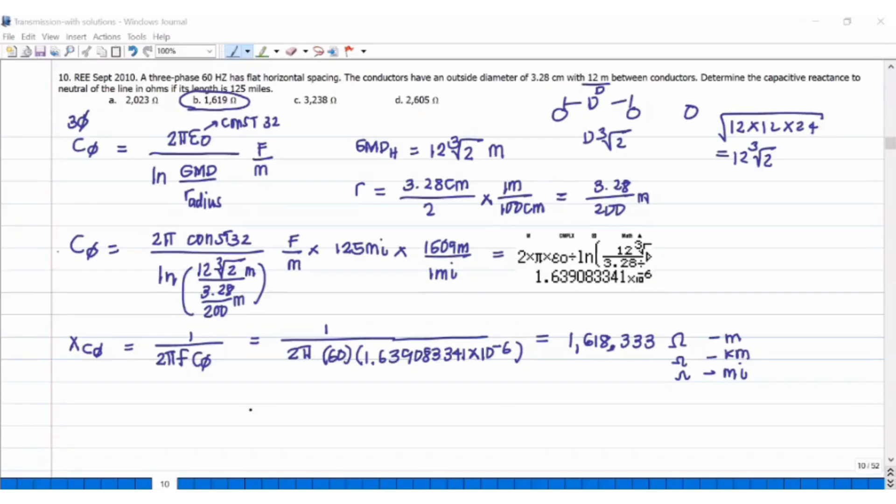Number 11. The conductors have an outside diameter of 3.28. Determine the capacitive reactance to neutral.

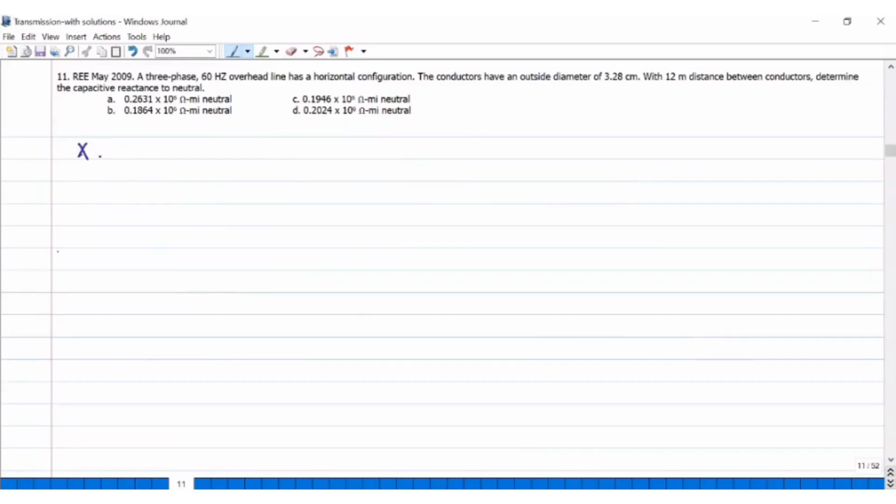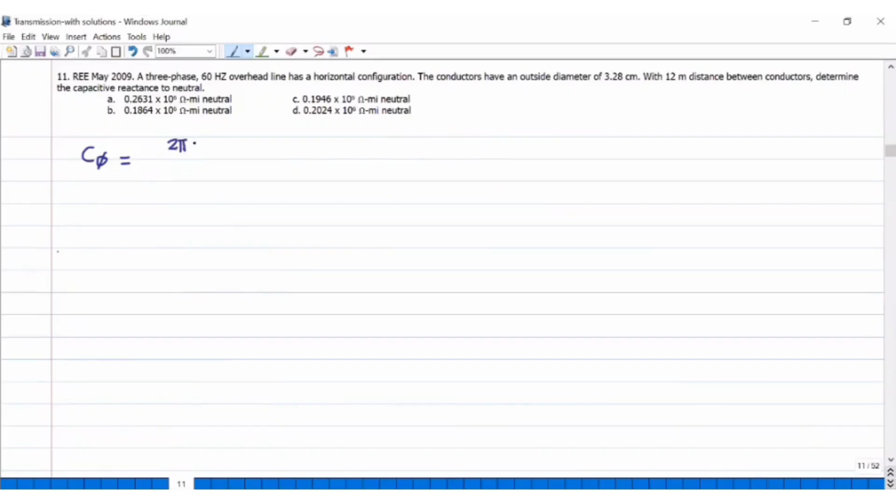So the value we computed earlier, XC per phase, is parehas ito dun sa number 10. So C per phase is 2 pi EO divided by ln of GMD divided by the radius. This is in farad per meter.

The unit of capacitive reactance is in ohm mile, so let's convert the distance to miles. 1,609 meters in 1 mile. But wala yung 125 miles. That will be 2 pi times constant 32.

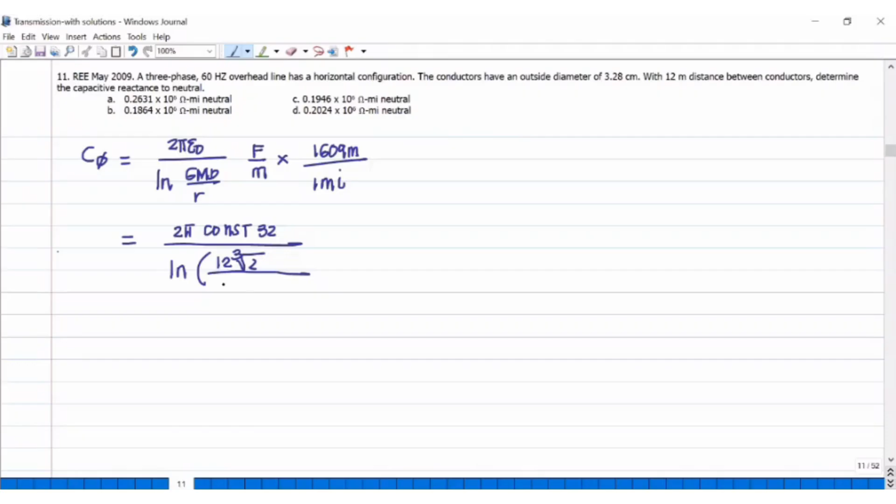Divided by ln of GMD, so 12 times cube root of 2 all over, earlier, 3.28 over 200 meters, times 1,609. Okay, so that will be in farad per mile.

Compute. Wala yung 125. Times 125. Ay, wala nga yung 125. 1609. 1.3113.

Then the value of XC per phase, 1 over 2 pi 120 pi times 1.311266673 times 10 to the negative 8. This will be in ohm mile.

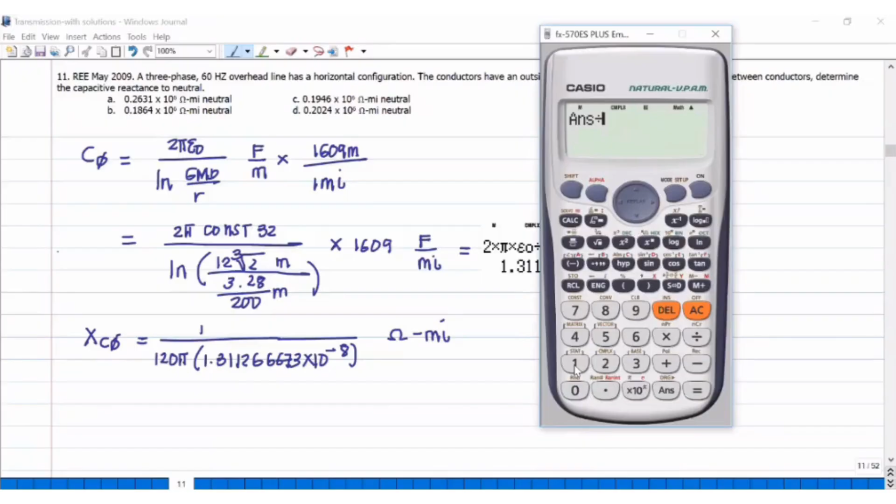So the mile unit here will increase. So this will be times 120 times pi. Then inverse, then divided by 1 exponent, giving 0.20229 times 10 to the 6 ohm mile.

Neutral. So nearest siya sa letter D.

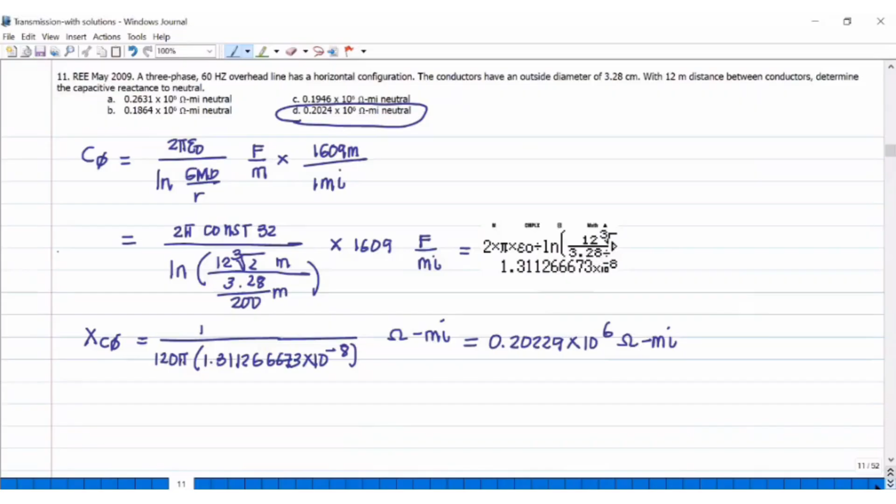Number 12. Calculate the capacitive reactance in kilo-ohm kilometer of a bundle 60 Hz 3-phase line having 3 conductors per bundle with 45 centimeters between conductors of the bundle. The outside diameter is 0.175 inch.

And the spacing between the bundle centers is 10, 10, and 20. This is how the conductors look.

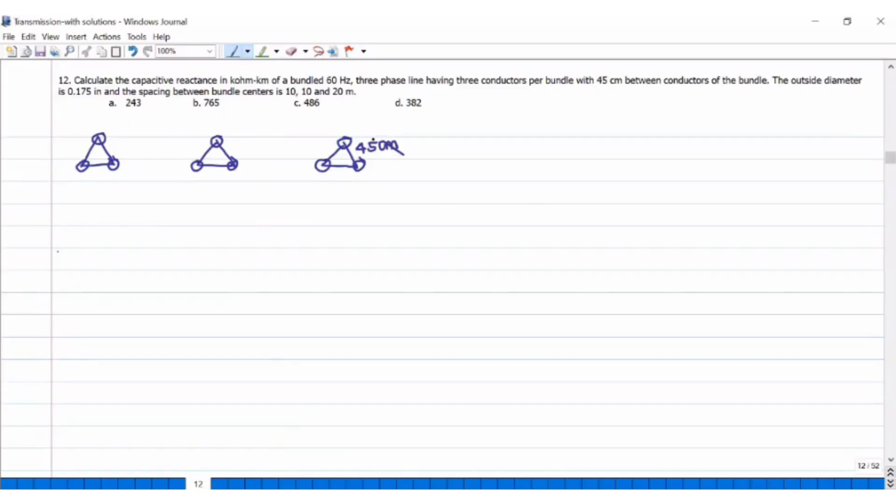So per bundle there is 45 centimeters. Then between centers, the adjacent spacing is 10 meters. Then on the other side also 10 meters. So it's still horizontal. So the equivalent GMD...

For horizontal configuration, the one adjacent side times cube root of 2 meters. Then the value of the equivalent radius for bundling. Okay, so this is for 3 conductors.

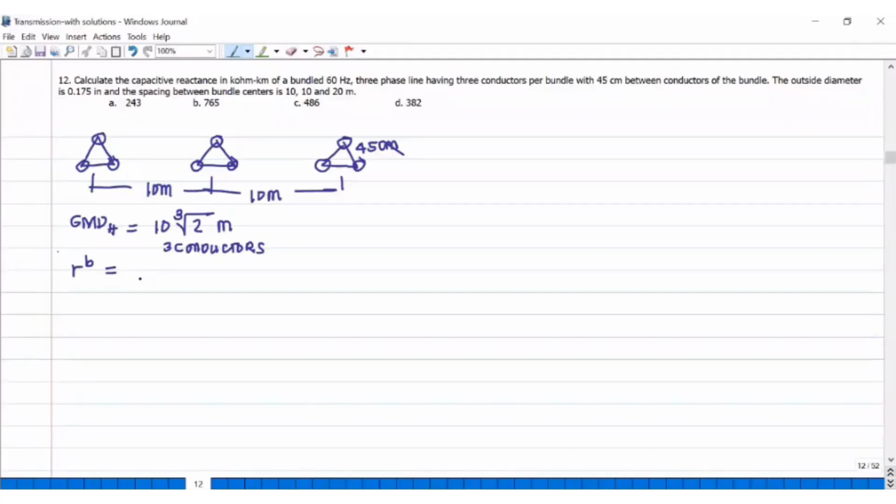Kindly refer to your handout. That will be cube root of the radius of each times the distance of bundling squared. This is the distance of bundling, between conductors. So that will be cube root of the given diameter.

0.175 inch. We divide by 2 to get the radius. Times, convert it to meters. 1 meter equals 39.36 inches.

Multiplied by the distance of bundling, 45 centimeters in meters, 0.45 meters, divided by 100, so that's 0.45, times 0.45 meters, then the quantity squared. Cancel the inches, so the remaining unit is cube root of meter cubed, so that will be in meters.

It's a small value, smaller compared to the GMD. Cube root of 0.175, divide that by 2, divided by 39.36 times 0.45 squared, giving 0.07.

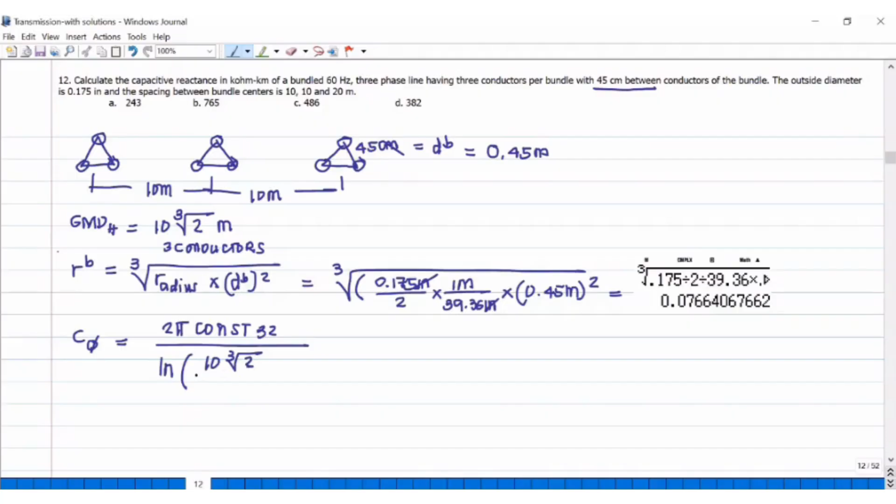So that will be 2 pi times constant 32 all over ln of GMD, that is 10, times cube root of 2, over in meters, also in meters, divided by 0.07664 meters. This is in farad per meter.

So let's convert it per kilometer, times 1,000 meters in 1 kilometer, is equivalent to an inverse, times 10 times cube root of 2.

Then you take the ln, that's in the denominator, times 2 times pi times shift constant 32 times 1,000. The unit of this is in farad per kilometer.

So what is XC per phase? 1 over 2 pi F times C per phase. So from farad per kilometer, the result will be in ohm kilometer times 120 times pi.

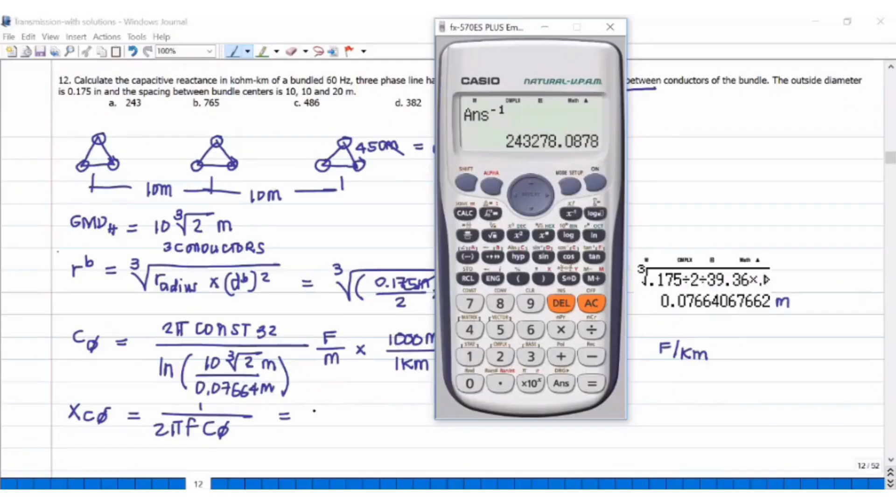So 2 pi F equals, then inverse, 243,278.0878. This is in ohm kilometer.

Multiplied by 1 kilo-ohm, equivalent to 1,000 ohms. That will be 243.278 kilo-ohm kilometer. So letter A.

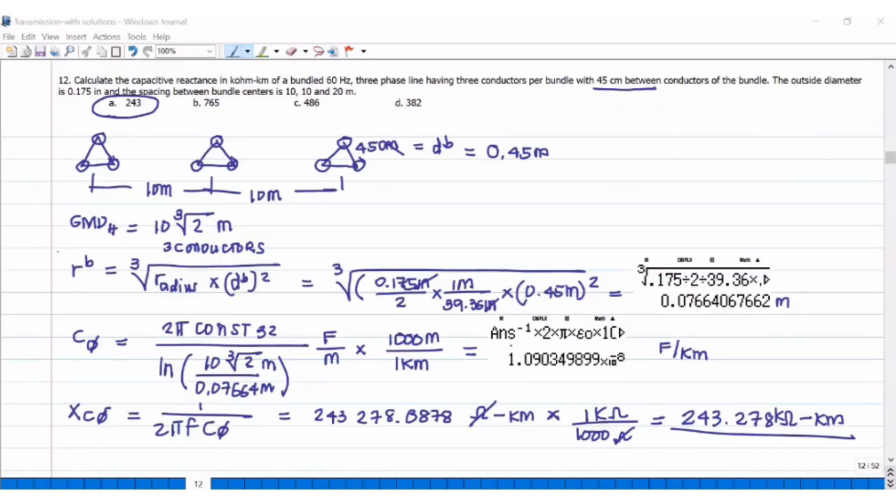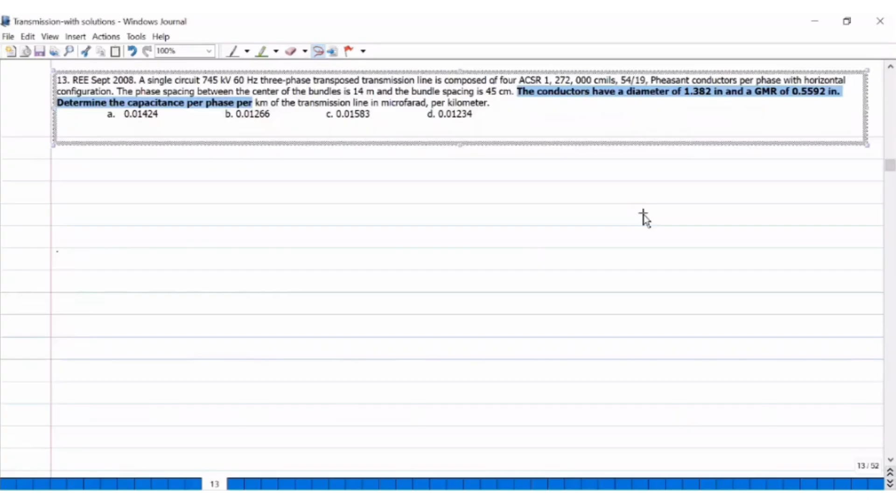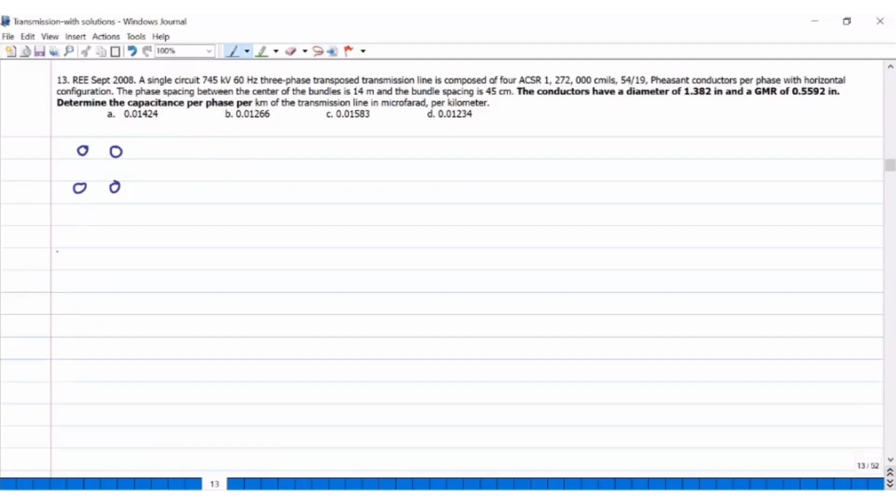So per kilometer, now there are 4 per phase. 1, 2, 3, 4, that's for phase A. Phase B, 1, 2, 3, 4. Phase C, 1, 2, then 3, then 4. There are 4 of them.

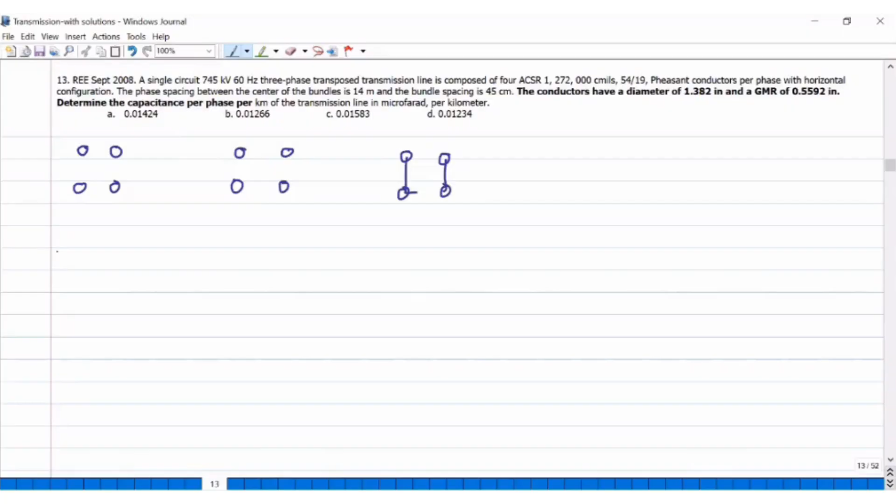So this is the distance of bundling. Okay, so for the radius of bundling for 4 conductors, RB is equivalent to...

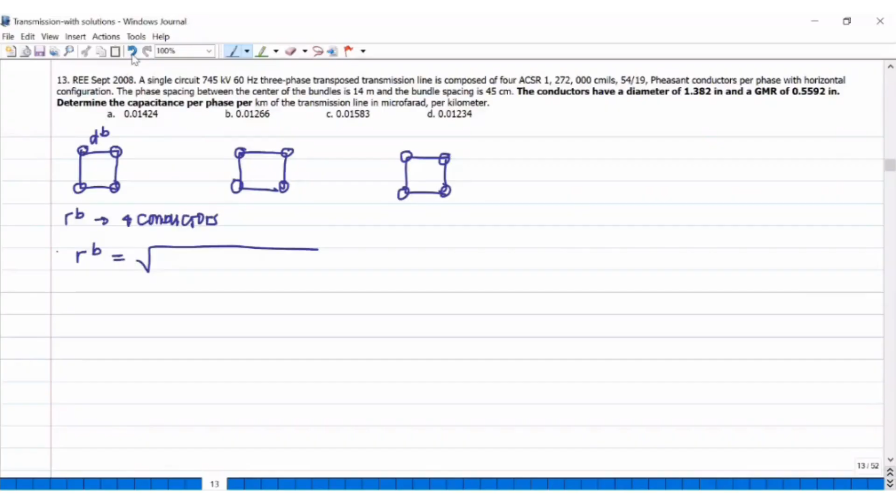The value 1.09 times the 4th root of the radius of each multiplied by the distance of bundling raised to 3.

The 1.09 is the 16th root of something, square root of 2. That's the value. It's d square root of 2. So it's like this: 16th root of square root of 2 raised to, 1, 2, 3, 4 raised to 4.

There it is, 1.09 is the constant there. If you're wondering where the 1.09 comes from, here it is: 16th root of square root of 2 raised to 4, because of the diagonal.

So 1.09 times the 4th root of the radius of each. So here we go: 1.382 divided by 2 times 1 meter.

There are 39.36 inches. Then the distance of bundling, okay, 45 centimeters again, that's 0.45 meters.

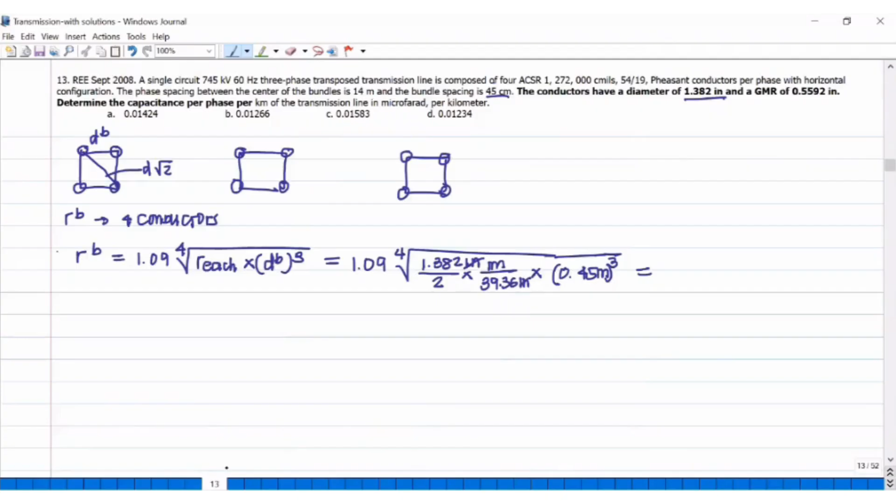1.09 times 4th root of 1.382 divided by 2 divided by 39.36 times 0.45 raised to 3.

Yan yung equivalent radius of bundling for each phase. Again, that is horizontal configuration. So ang GMD, ulitin natin yung ginagawa natin dati. Yung isang distance, 14 times cube root of 2 in meters. So ito, naka-meter din. So dapat yung radius of bundling saka GMD parehas ang unit.

Kaya yung capacitance per phase, tapos per kilometer, capacitance. So that will be 2 pi times constant 32 divided by ln of GMD 14 times cube root of 2 all over the radius of bundling, yung equivalent na nasolve natin, 0.2179925355, both in meters. This is in farad per meter times 1 times 10 to the 9.

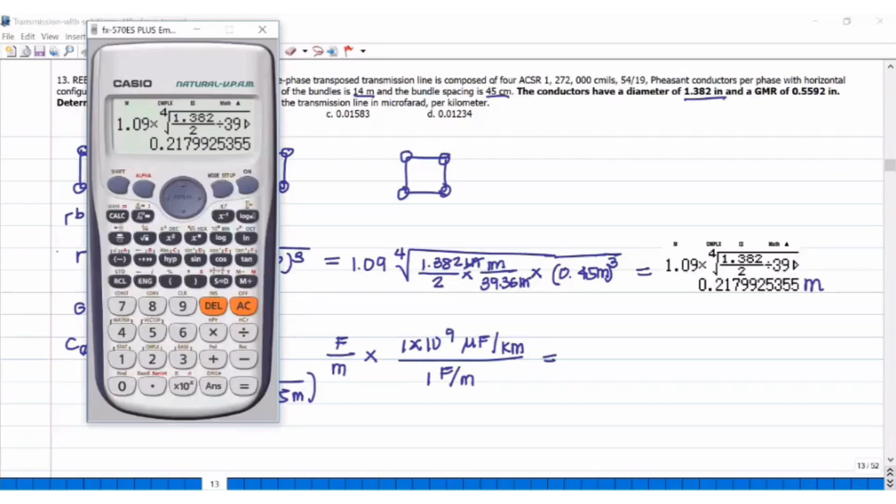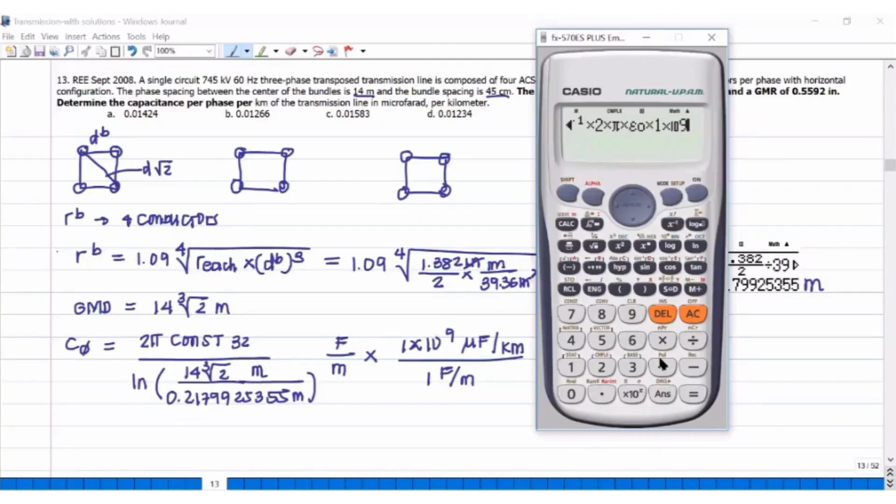Microfarad per kilometer. Yan yung conversion in 1 farad per meter. So nasa baba yan, inverse times GMD 14 cube root of 2, inverse ln, then inverse times 2 times pi times constant 32 times 1 exponent 9 to 0.01266, which is A, B, C, D.

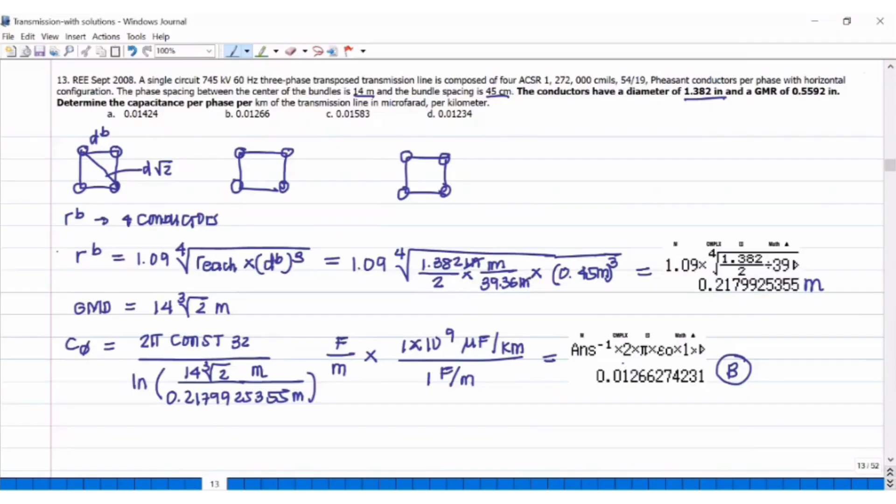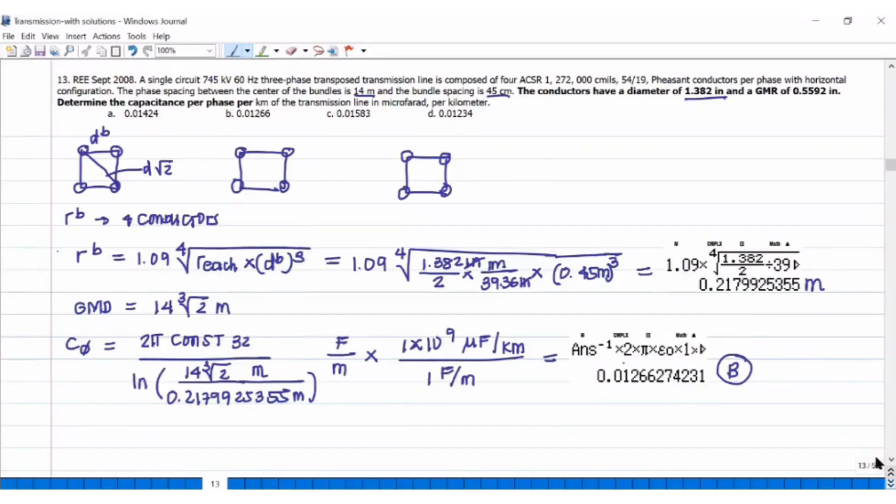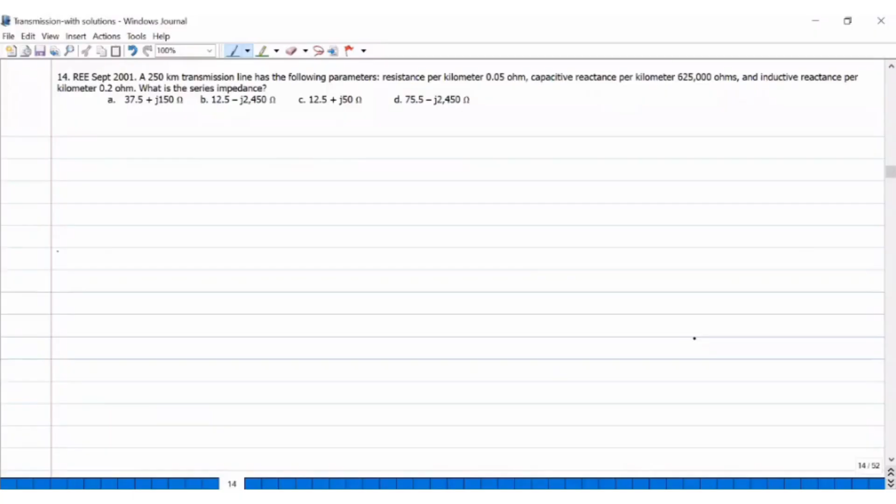Okay, next. Layo-layo pa. 14. A 250 kilometer transmission line has the following parameters: the resistance per kilometer, capacitive reactance per kilometer, 625,000 ohms, and inductive reactance per kilometer. What is the series impedance? So that is R plus JXL.

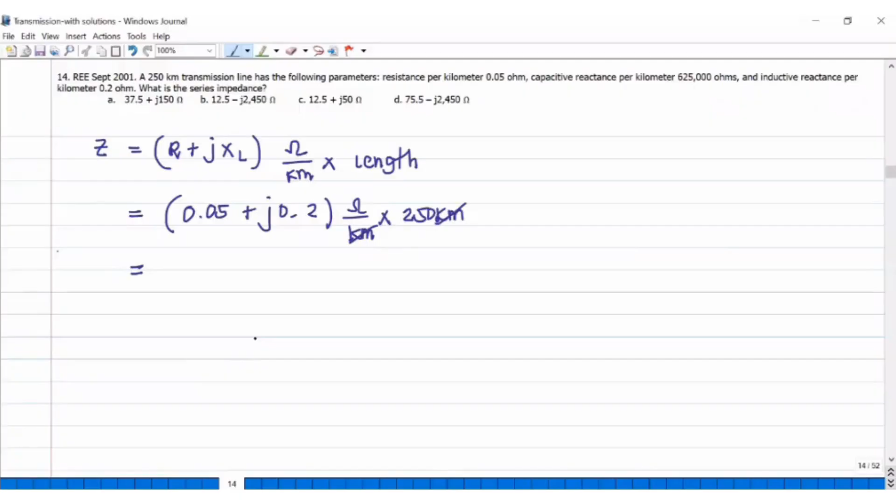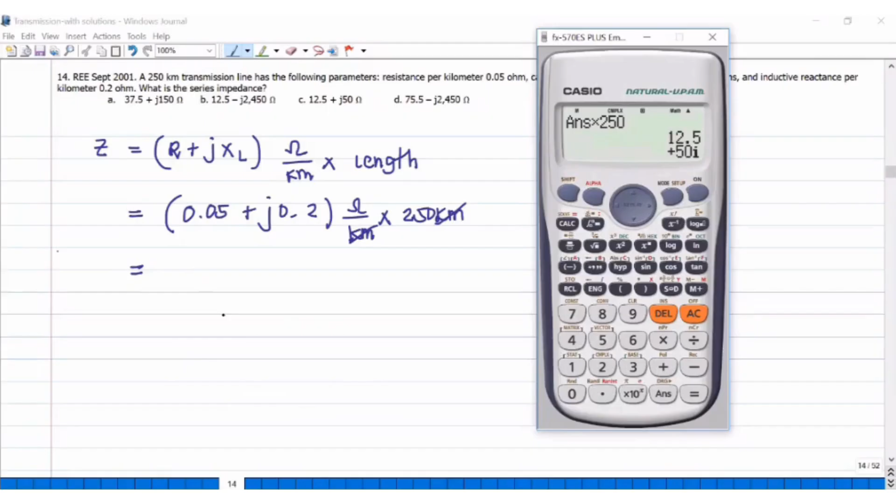Kung naka-ohm per kilometer yan, times the length, para makuha natin yung total impedance ng line. The resistance is 0.05 ohm per kilometer plus J 0.2 ohm per kilometer din. Then times the length, 250 kilometers. Cancel yung kilometers. The remaining unit will be in ohms. 0.05 plus 0.2J times 250. So that will be 12.5 plus J 50 ohms.

Pag series sa impedance naman, hindi kasama yung negative J. Puro R plus J XL. Naka-separate yung capacitive reactance. Depende sa type ng connection, kung naka-pi or naka-T connection.

So na ganyan lahat. Yung isang binigay din sa power system, sending end voltage. Saka yung ibang objective. Mamaya makikita natin yung objective na yung favorite nila. Saka yung mga ibang objectives na nandun sa, bibigay na lang namin yon sa pag malapit ng exam. Basahin nyo muna yung mga lahat ng naibigay namin.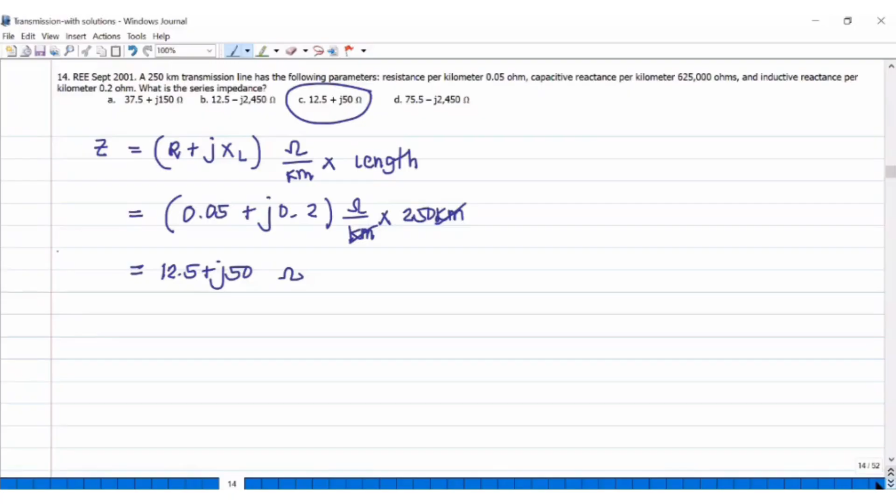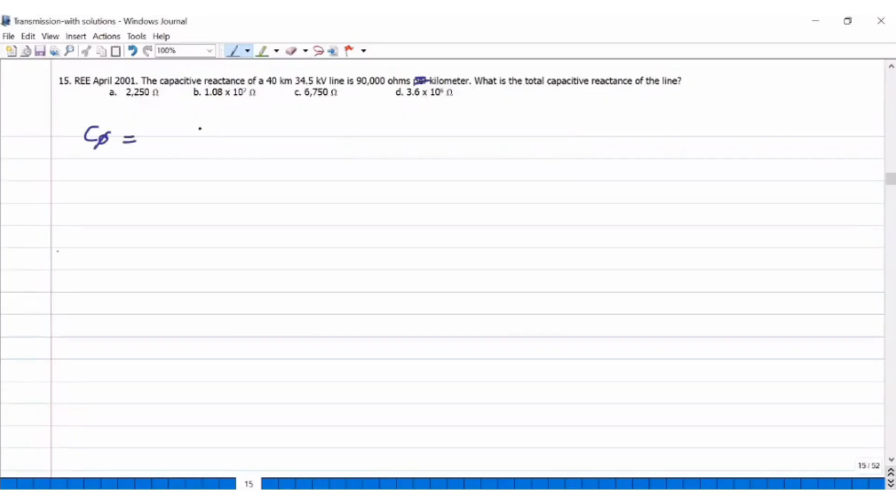So number 15, the capacitive reactance of 40 km 34.5 kilovolt line is 90,000 ohms. Hindi pa yan ohm kilometer. O yun yung kanya. Baka tatanungin nyo ako, ohm kilometer. Diba pag nag-compute tayo ng C, naka-farad per meter. Yung unit ng XC, naka-ohm, unit of length. So ohm kilometer.

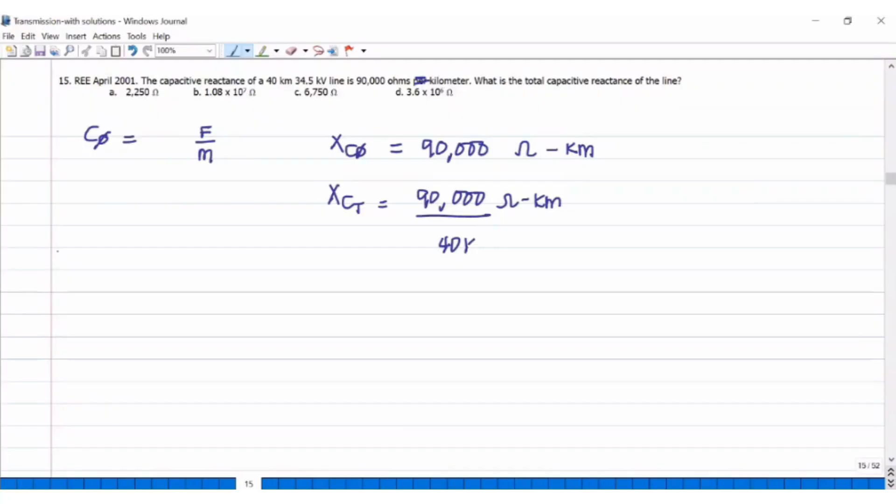So 90,000. Kapag kukunin nyo yung total capacitive reactance of the line, that will be 90,000 ohm kilometer. Divide that by the distance, 40 kilometers. Kung i-multiply nyo, meron. Kung i-divide nyo, meron. Ang correct solution, division. 90 exponent 3 divided by 40. 2250.

J or negative XC, negative J. So 2250 ohms.

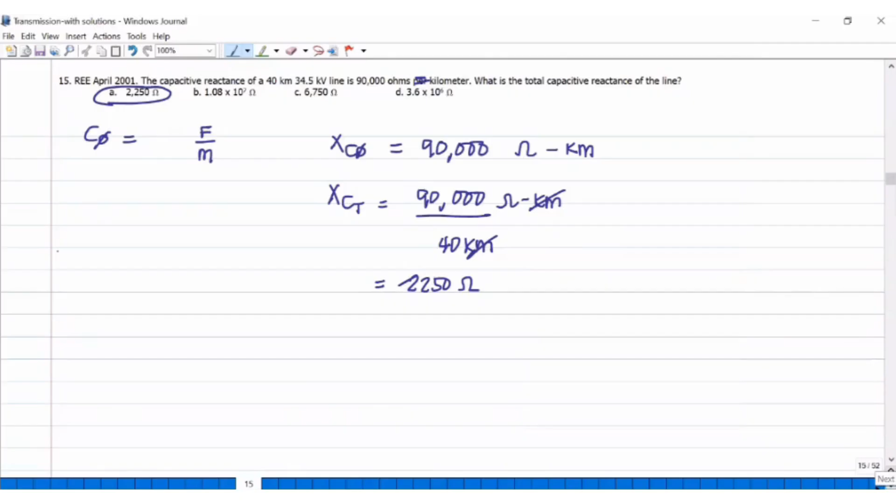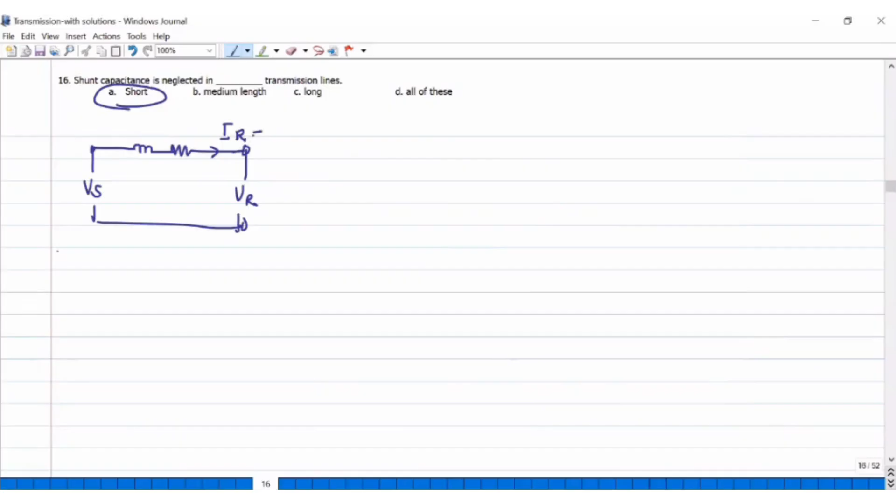This is a shunt capacitance is neglected in blank transmission line, short. So ganito lang yung configuration niyan. Pag short transmission line, simple series circuit with the receiving end voltage, sending end voltage. So wala yung naka-pi saka naka-T. Ito yung IR is equal to IS. Ito yung Z ng line. Ito yung sa short transmission line. Yan yung consideration natin. Yan yung ating i-consider na circuit.

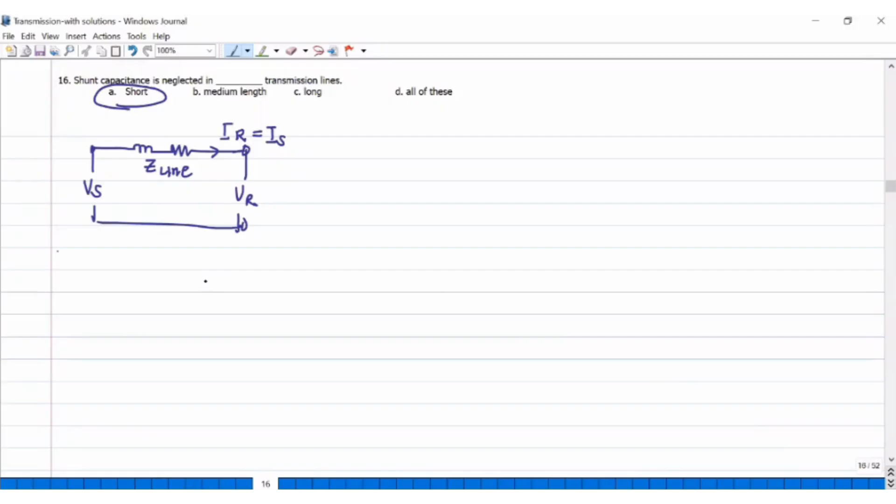Sending end voltage, parang source. Yung generated voltage ng alternator. Tapos yung VR, terminal voltage ng alternator. Yung Z line, parang yung armature impedance.

Okay, number 17, a 30-mile three-phase transmission line is to deliver 20,000 kilowatts at 69 kV at 85% power factor. The line resistance is 0.324 ohm per mile and the inductive reactance is 0.737 ohm per mile. What is the line loss?

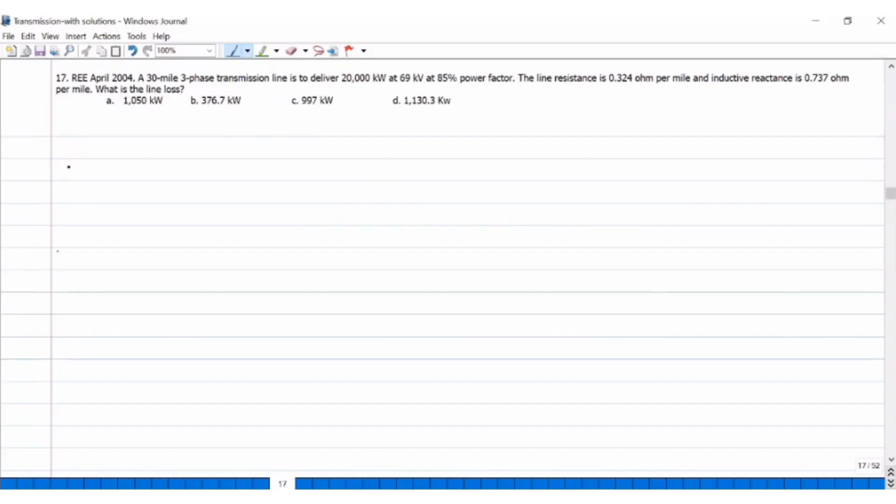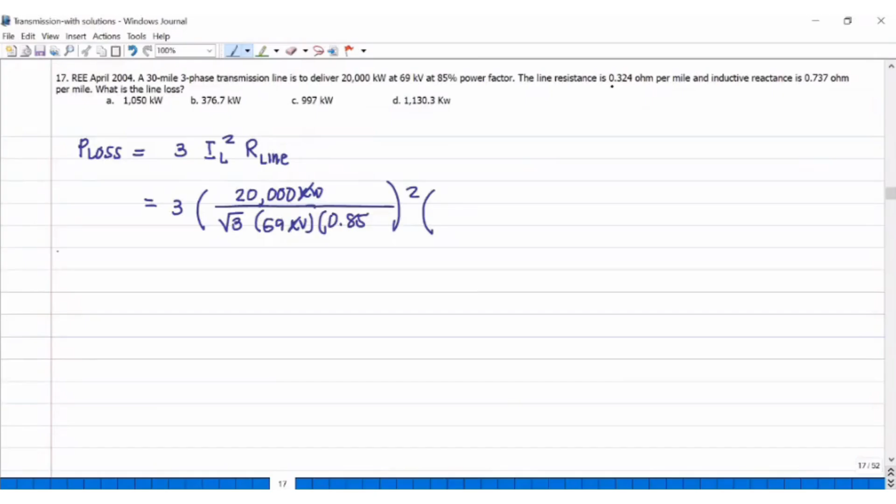Line loss. P loss. So 3-phase yan, 3 times I line squared times the resistance per line. So 3 multiplied by the current, 20,000 in 3-phase current, divided by square root of 3 times 69. Ito naka kilovolts, ito naka kilowatts. Cancel yung kilo. Then para maging volt ampere, divided by the power factor. Then squared. Multiplied by the resistance is in ohm per mile. Kaya multiply pa natin ng total length, 30 miles.

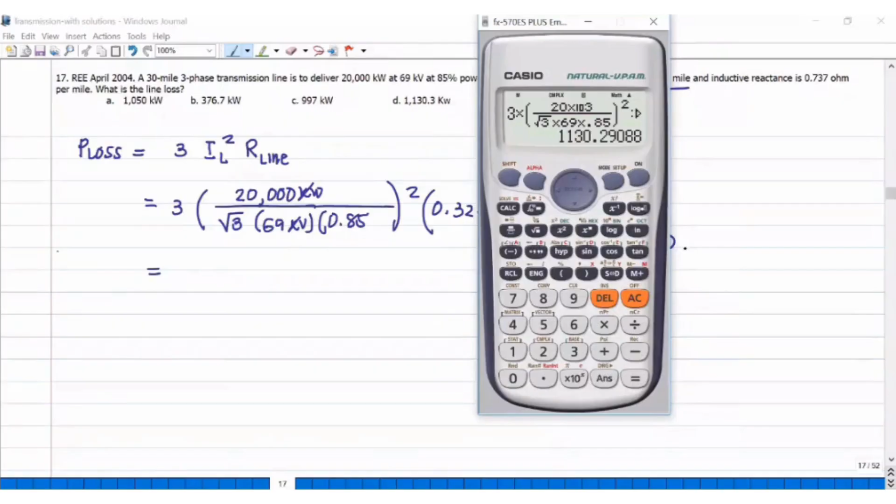Then naka kilowatts, so divided by 1,000. 3 times 20 times 10 exponent 3 divided by square root of 3 times 69 times 0.85 squared times 0.324 times 30 divided by 1,000. 1130.3. 1,130.3 kilowatts. Yun yung dumaan dito sa tatlong linya.

Ito yung I-line. Kung ano yung line current na dumaan dyan, pare-parehas dito, balance. Pag normal operation, saka lang naman siya nagkakaroon ng unbalancing kapag nagkaroon ng short circuit or malfunction or any disruption in the power generation or power transmission. So letter D.